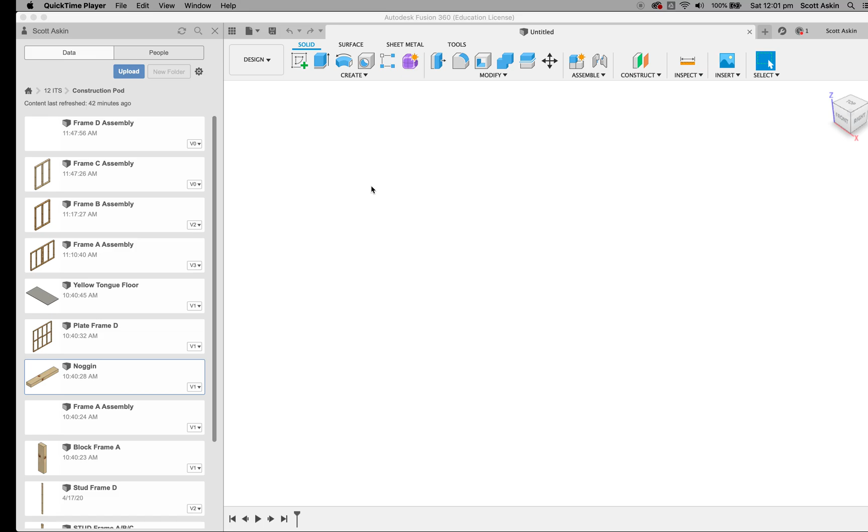Okay guys, next tutorial we're actually going to put all of the frames and the floor together to create your complete assembly. If we study the final product, we can see there's frame D lying down as the floor. On top of that we've got the particle board flooring, and then on top of that we have frame A running through from one side to the other, with B and C joining onto it accordingly.

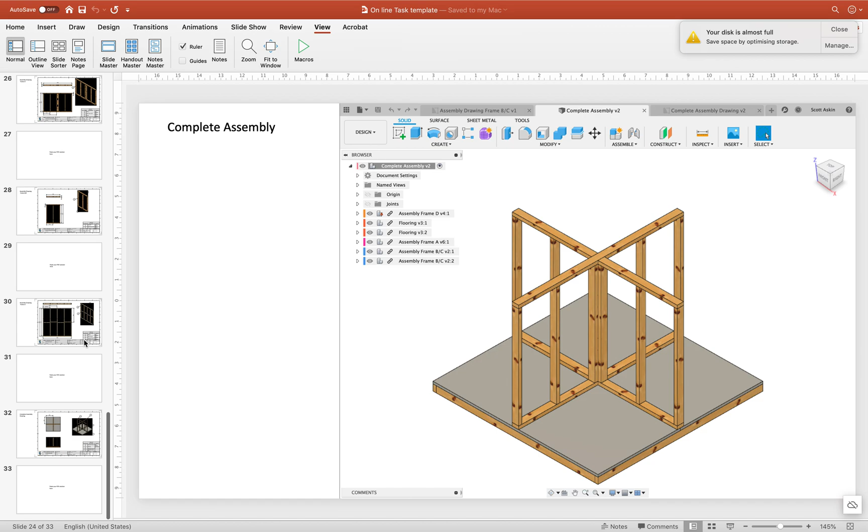A couple of things to look at from the assembly drawing. If we skip down a few slides, the main thing to note is that the distance from the outside corner to the inside face is 865. That should be a constant throughout each corner if we've done things correctly.

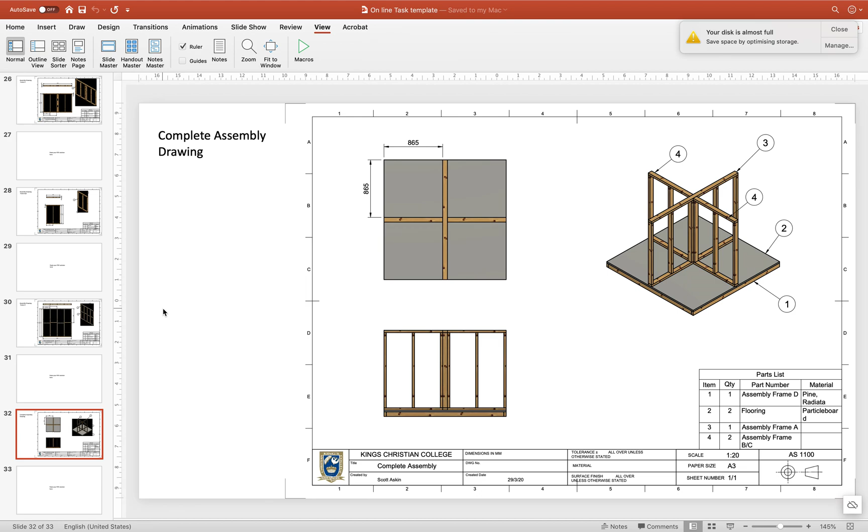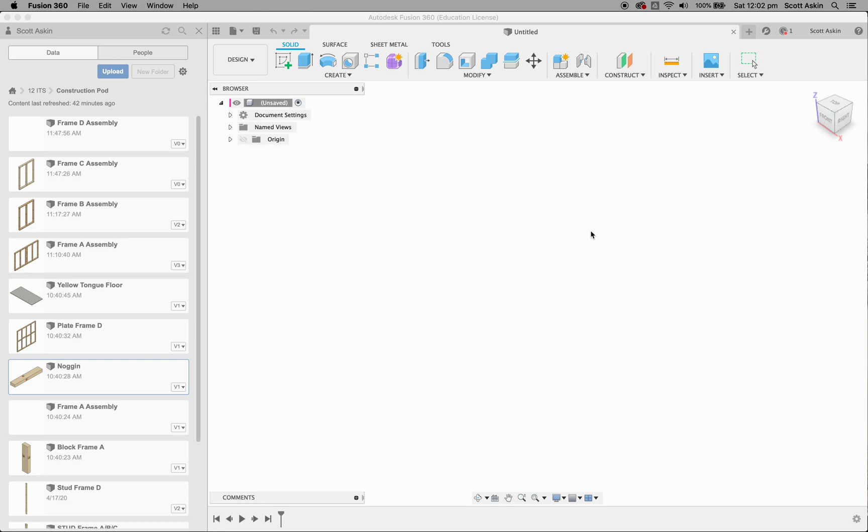Okay, so let's assemble all these parts together for a complete assembly in Fusion. Go to Fusion, create a new file if you haven't already got one, and save it straight away. Let's call this one complete assembly.

It would make sense to start by putting frame D down first as the floor. I'm going to go to frame D, find it there, right click, insert into current design. You can see here it's in an upright position.

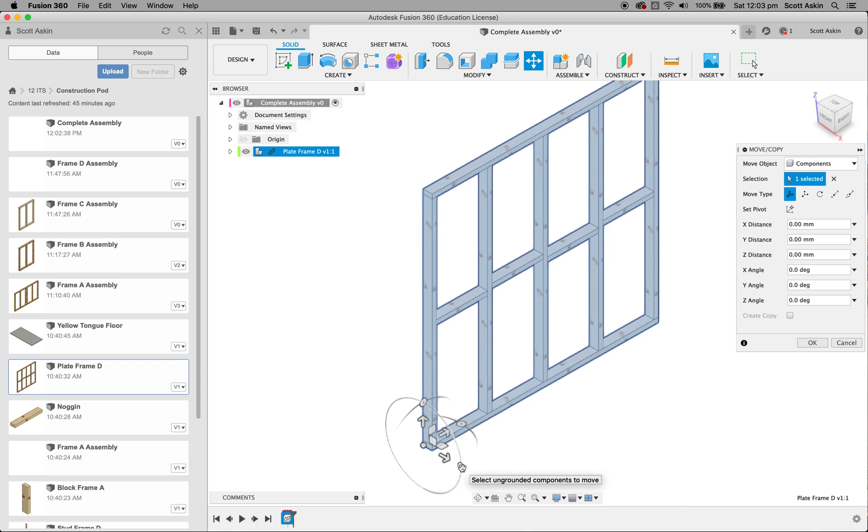So I want to rotate that into a floor-like position. I grab this handle here and drag it down -90. Remember, it's always multiples of 90 degrees. I could have done the same thing by rotating it the other way. It doesn't really matter as long as it's in multiples of 90 degrees. That looks pretty good, so I'm happy with that.

I click OK. Before I do anything else, I need to ground this whole frame so everything else moves relative to it. I select it, right click, and click on ground. It's now fixed in space, so everything else will move accordingly to it. Alright, so that's frame D down as the floor.

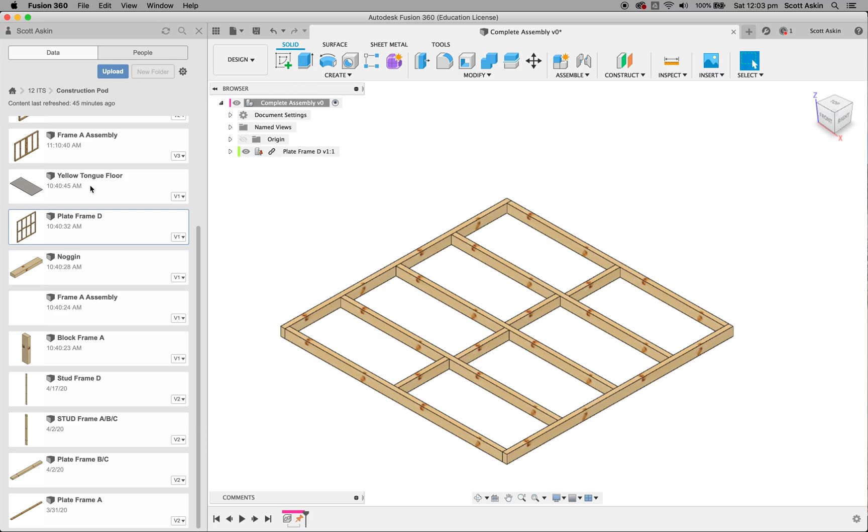Let's now put the particle board, the yellow tongue, on top. I go find that, there it is, yellow tongue floor. Right click, insert into current design. Let's just pull it away a little bit to make sure we get this thing lined up correctly. Click OK, pretty easy here.

Now, one thing I'll notice here is that the long edge of the particle board is running along the edge of our stud. What I might do is actually spin this 90 degrees so it's running at a right angle to the studs, which should give us a bit more rigidity in our frame.

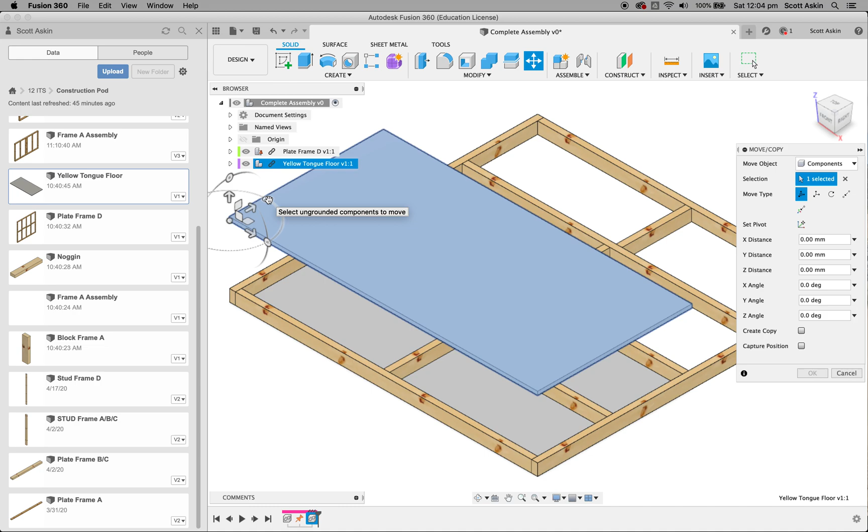So I'm going to actually edit this particle board so it's turned 90 degrees. To edit something, I click onto it, right click, go to move or copy, and it gives us a few settings and all those tools to work with. I'm going to spin this around 90 degrees. Doesn't matter if it's negative or positive at this point in time.

Click OK. Then I'm going to apply a joint between this bottom right corner here and the far right corner over here on my frame. So joint like we've been doing. Yes, I do want to capture its position. I go to the bottom right corner of my yellow tongue, and then to the far right corner there of my frame.

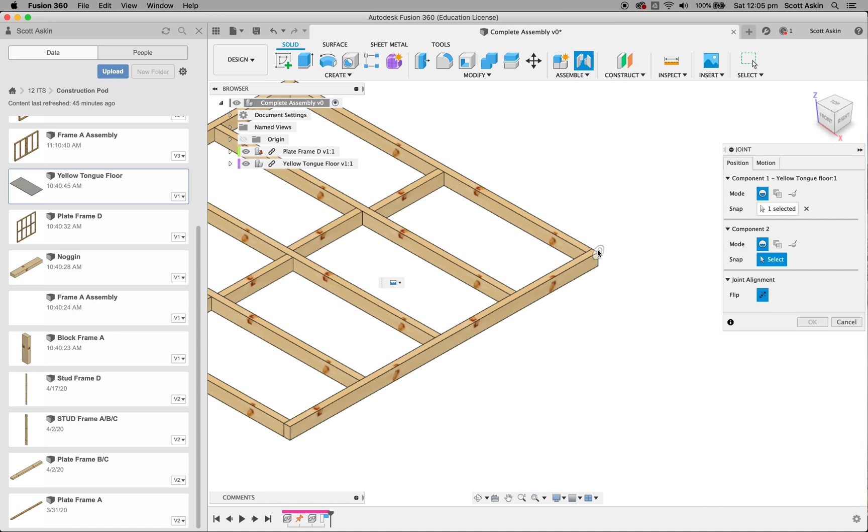Now, see how the cursor's not immediately going to that flat position? So what I'm going to have to do here is zoom in a little bit and put my cursor along that flat edge so it's in the correct orientation, even so it's still being a bit of a pain. I'm going to zoom in even further. Oops.

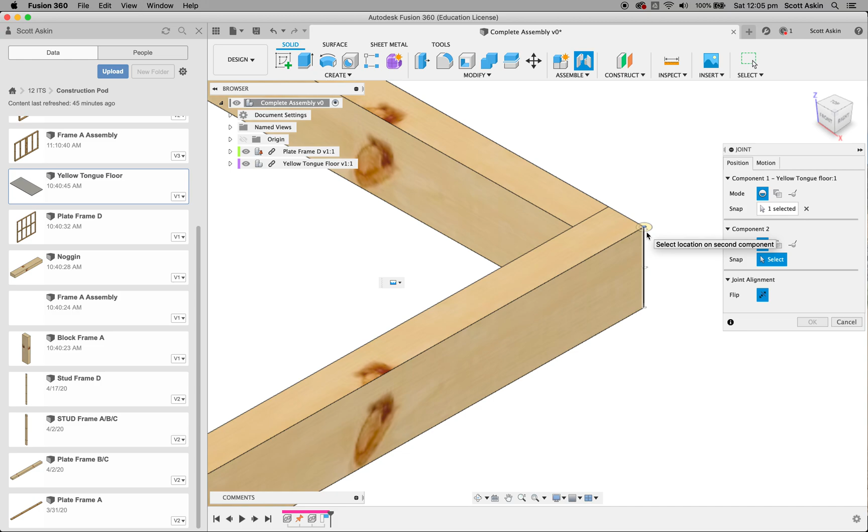Hopefully we'll get this thing to go - there it goes, there it's in now, it's in the correct orientation. Remember, you have to have both of those planes, those little circles, in the same parallel plane. Click there, in comes our particle board, our yellow tongue, which should be correctly aligned. I'll zoom out a bit, looks good. Click OK, and then I'm going to copy and paste that over the side as well.

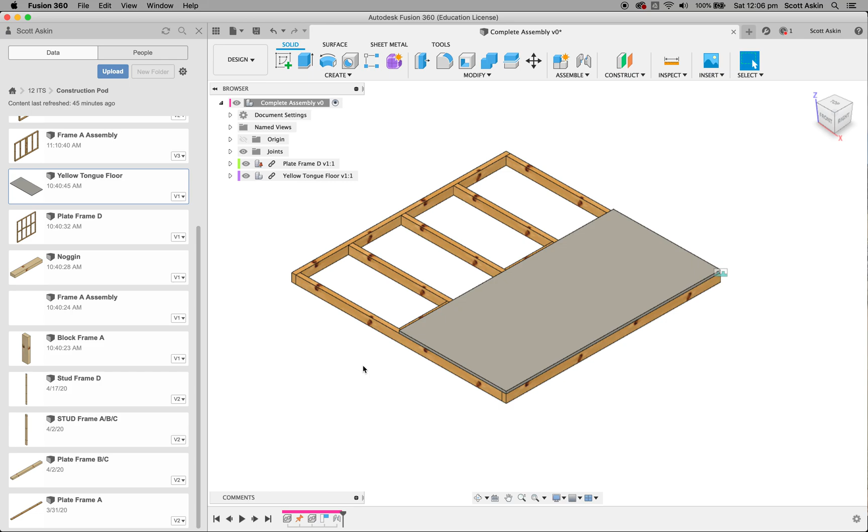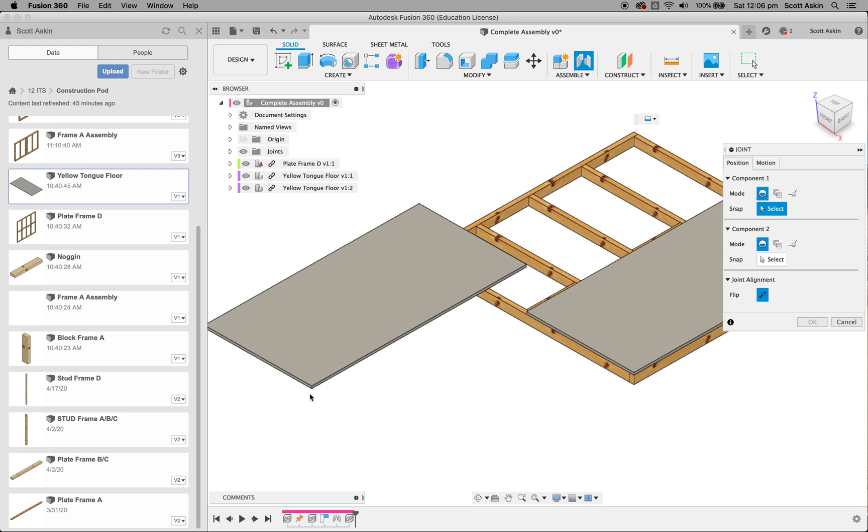Select the yellow tongue, Command C, Command V, and this time let's just grab this corner here and line it up with that corner there. It should be all good. So OK to the copy. Let's go to a joint. This time I'm going to select that top corner - if I can just get it to zoom in, that would be good.

I'm going to select this top corner here, and then select this top corner over here, because I know those two corners are going to join together, and I'm happy with that. Click OK, and as before I like to turn the joints off so we can see if things are correct. Just turn it off here up in the file tree.

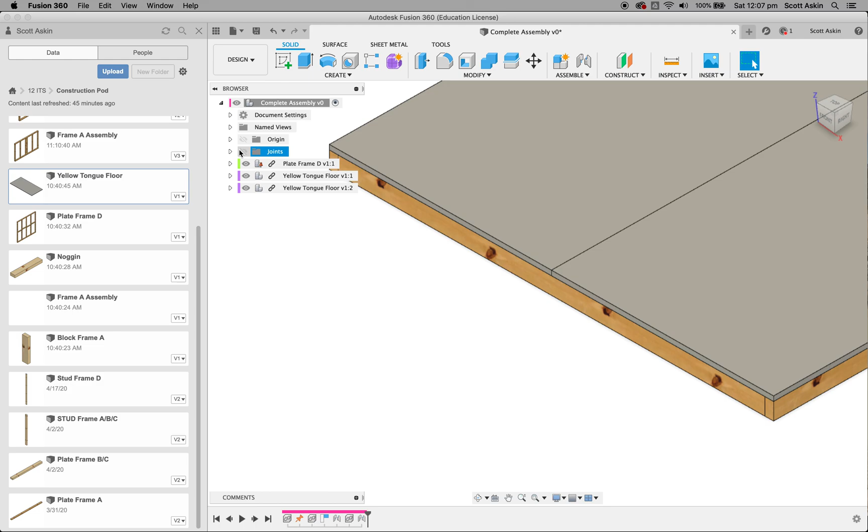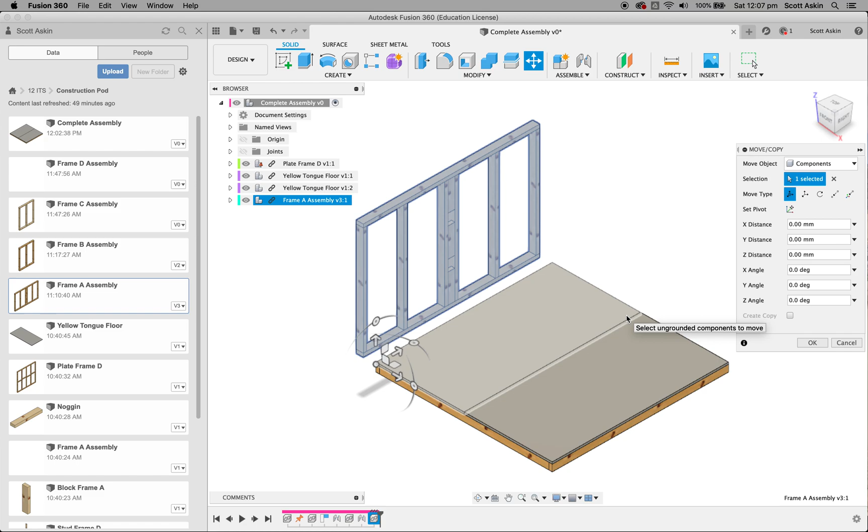Click on save before you lose it, and let's now put down frame A, B and C. So go find frame A, here it is, right click, insert into current design, and it's in the correct orientation, as in it's upright. I'll basically just move it onto the center of my board here. I'm going to leave it in that position. It's pretty good with that orientation.

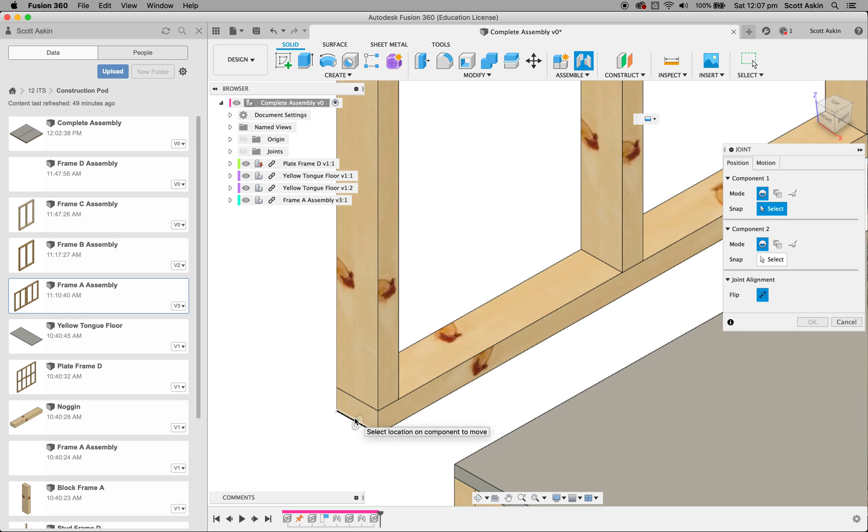Let's apply the joint. I now want the center of this plate here to line up with the join here of my particle board. So I'm going to zoom in, because it's sometimes hard to find where to locate things. And I grab that bottom plate and I find the center of that bottom plate. You can see there it's snapping to the center. Click once, and then I'm going to find the corresponding center over here.

On where the join is between these two bits of particle board. Now it's not being very nice to me. Let's have a look, see where there it goes. You can see now I've got those two circles parallel, and also that is the center.

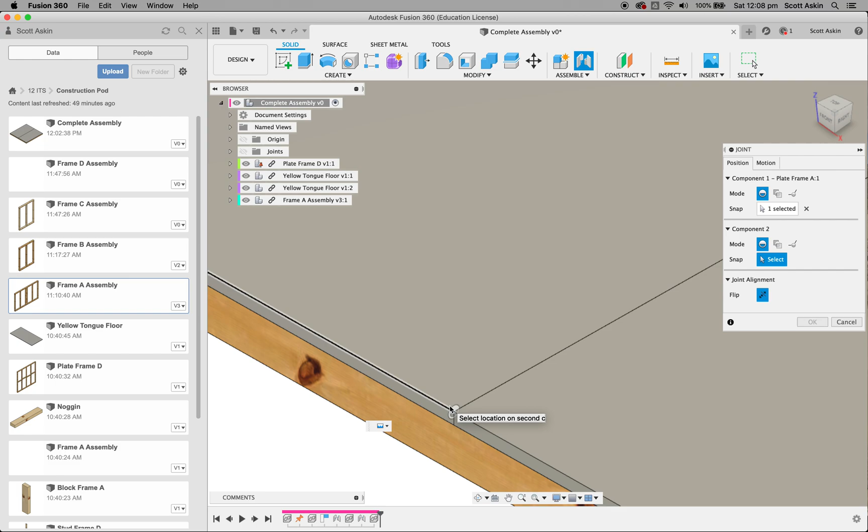And it appears to have only moved the bottom plate. That's okay, the rest will catch up when we click OK, but that is correct. You can see the center of the bottom plate is now in the center of those two pieces of particle board. Click OK. I'll just zoom out to show you what I mean, which is correct. You can see that center there now, that's correct. And then we'll do exactly the same thing for positioning the other two, frame B and C.

So let's bring frame B in, right click, insert to current design. We'll need to rotate this, so I'm going to rotate this 90 degrees. Positive, negative, doesn't really matter. Click OK. Let's put a joint between them.

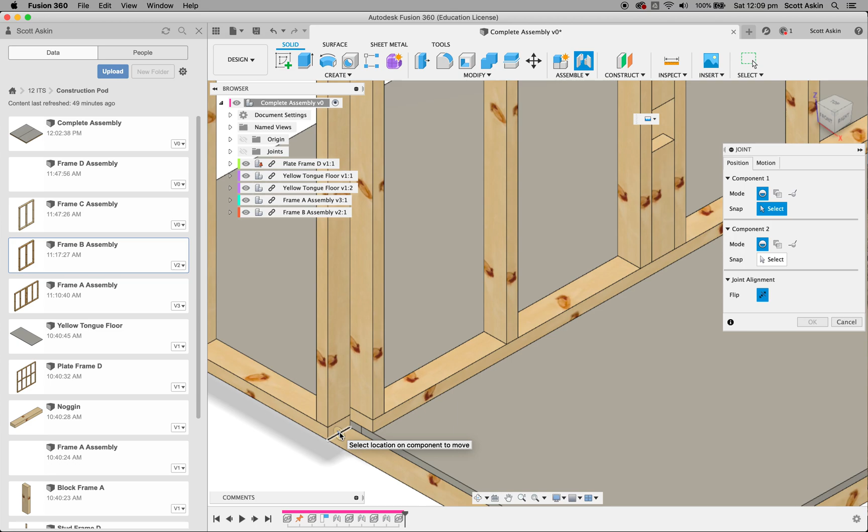So I'm going to zoom in, and once again using that midpoint tool, which is really handy. There it is there. You can see there's the midpoint along that bottom plate. Click once, move your way over, see whether you can now find the midpoint along this edge here, and you can see there it is. Now be careful you don't get the bottom midpoint, or get the top midpoint, because it's sitting on top of the object. And that looks correct. Let's click OK.

So far so good. Now, if you did make a mistake, remember you just go to the joint, there it is, right click and edit, and you can go back and deselect these things and start all over again if you wish to.

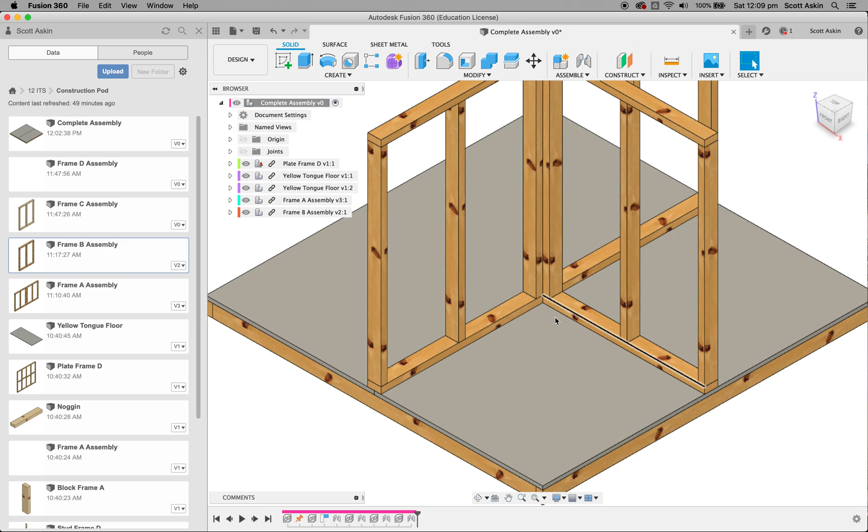Right, last one to do then will be the other frame around the side. So to spin that around, I'm going to hold down Shift and two fingers on my trackpad so I can see the other side. Or I could use these corners here. Oops, that didn't do exactly what I wanted to do. Click that one there, that's it. So these are the different viewing positions that we can select. That's looking good for me.

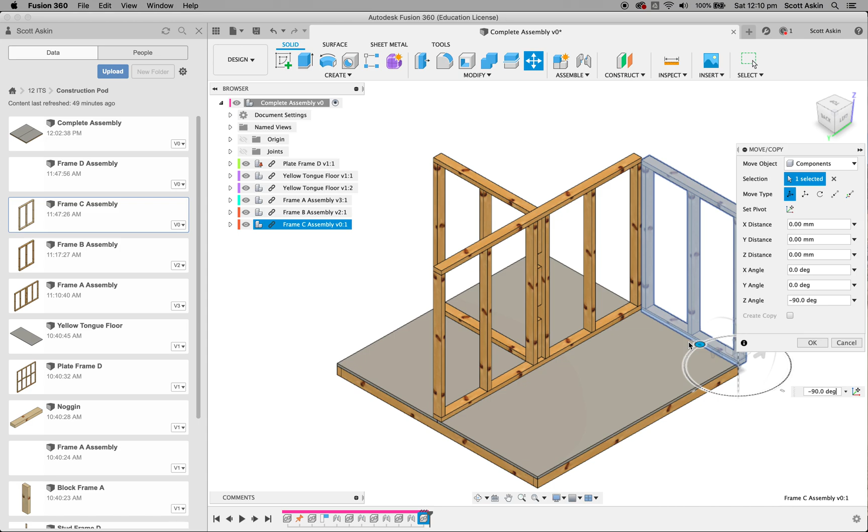I'm going to bring in frame C this time. The reason why I'm bringing in frame C, not just doing a copy of frame B, is later on in my assembly drawing, I actually want frame C to be labeled correctly. You'll see what I mean when we do this later on. So insert into current design. Once again, let's rotate this thing 90 degrees. Click OK. Let's put a joint between the two of them.

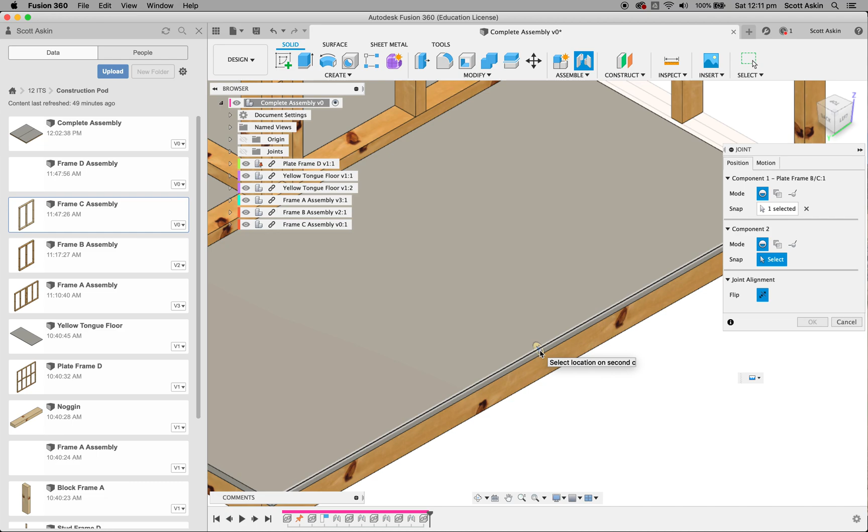Click joint, zoom in, same way we did before. So it's the midpoint on that bottom plate. Click once, and then find the corresponding midpoint on the top of the particle board there, not top meaning that way, but still have those two circles align with each other. And that looks correct, so we'll click OK.

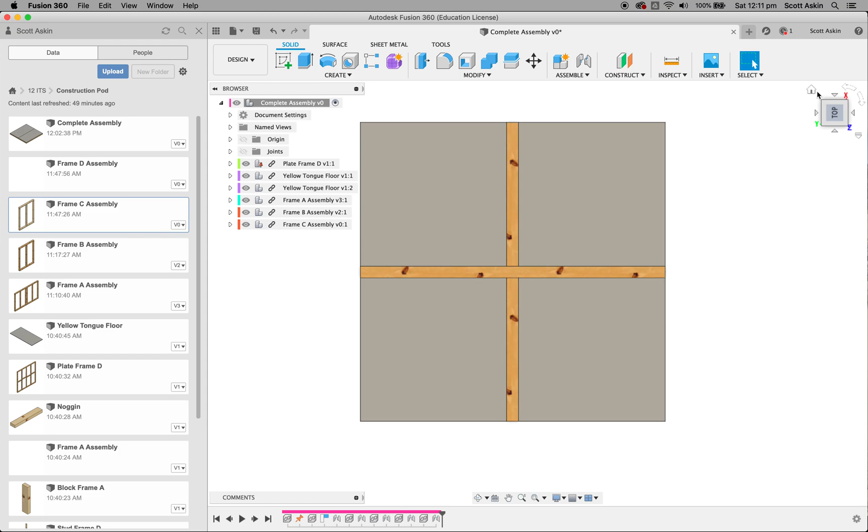Let's have a look, zoom out a bit. It looks good from there. Let's go top view to have a look. Yes, all the four corners are lined up correctly. Let's go to home view. Let's go front view to have a look. Yep, the tops are all correctly lined there, and there's nothing going below each other, which looks correct.

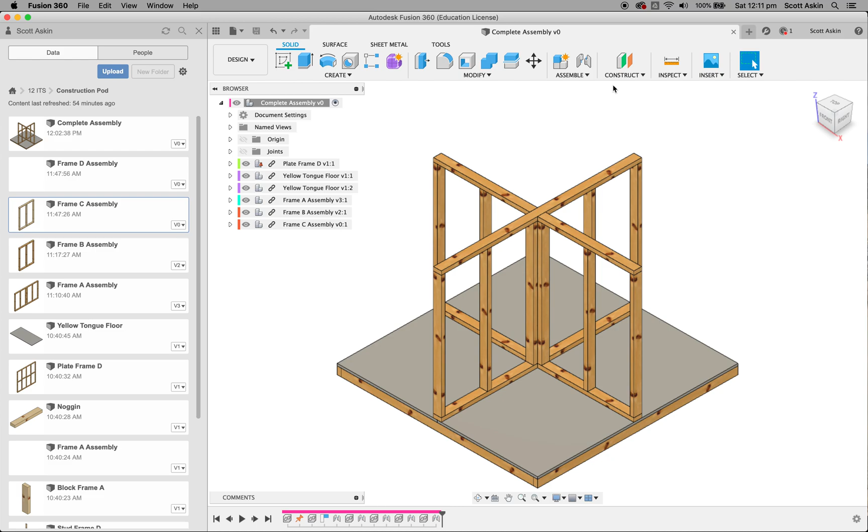Okay, you can hit save, and you have now assembled all the parts. So next thing we'll do will be go on to doing some drawings and then some renderings.